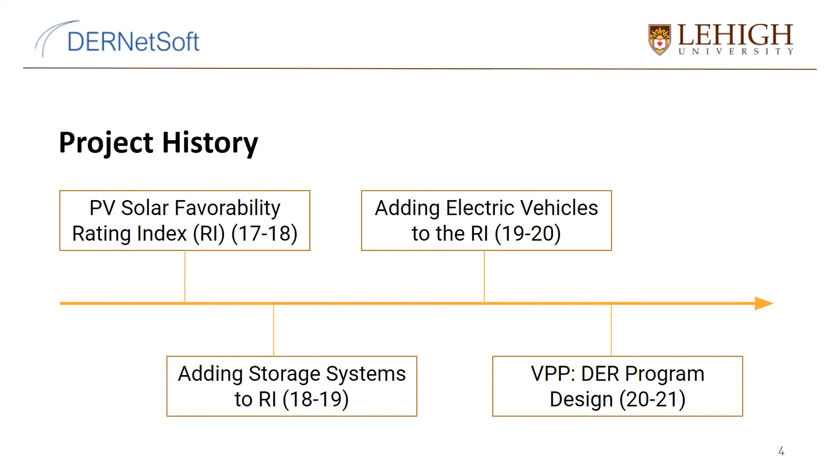This year, Jasper and I, with our project, took a bit of a pivot to the virtual power plant, the DER program design.

Project scope: last semester was a lot of research. We researched existing VPP programs, the utility approach to DERs, how they're handled, and the communication links between them. Then we collected data and requirements for DER aggregator program design, everything that needs to go into creating this program.

This semester, Jasper and I split the work a bit. I researched and decided on data models for the request and response side, taking the request side, the ISO/DSO side, while Jasper took the DER side, the response side. We created a program that accepts and responds to grid requests based on the data models we created, and we're currently working on testing and improving that program based on simulated and real data we have from DER NetSoft.

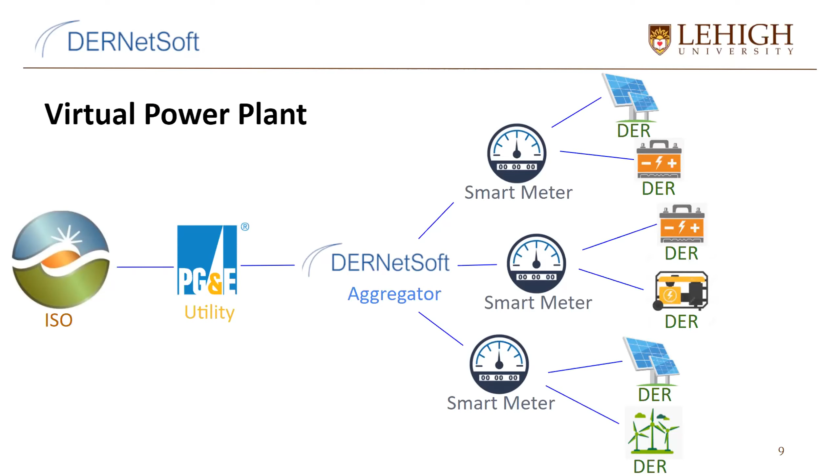Some benefits of integrated DERs and virtual power plants: it supports the grid by providing ancillary services such as frequency and voltage control.

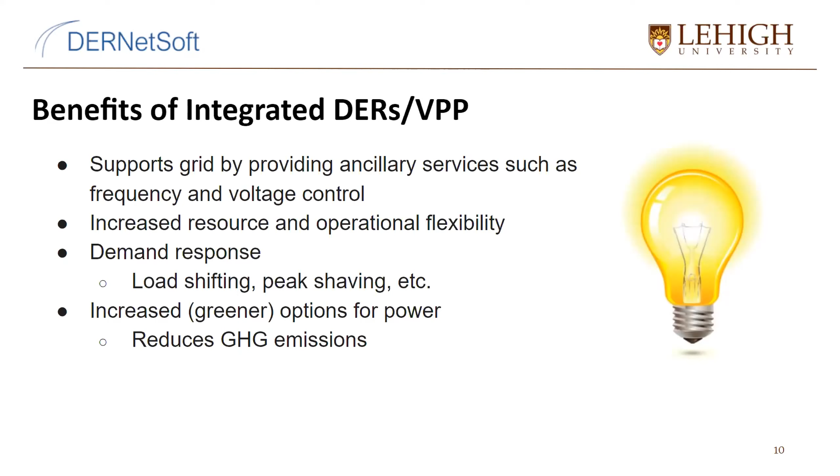It gives increased resource and operational flexibility, to talk about a little bit more with demand response. That gives the opportunity for load shifting and peak shaving, things along that nature. And the bigger picture here is increased greener options for power, so that reduces greenhouse gas emissions, which is important today.

What opened the door for a project like this to even exist, or the concept of a virtual power plant to exist, is FERC order 2222. This FERC order opened the door for DERs to participate in the wholesale market by removing barriers to entry. Before FERC order 2222, you had to meet a minimum of 1 megawatt capacity to be allowed to participate in the wholesale market. But with this order, they now allow an aggregator to aggregate several smaller capacity assets together to meet that minimum capacity requirement.

And with this, I'm going to turn it over to Jasper to talk about the virtual power plant communication links.

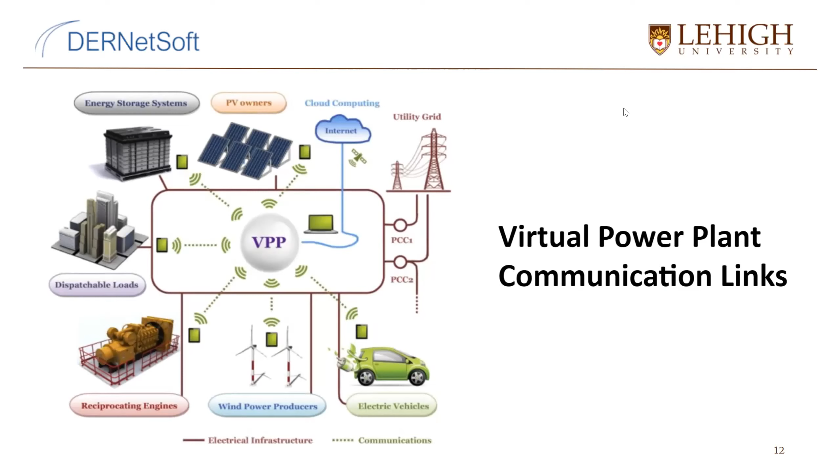Thank you, Dylan. So for virtual power plants to be effective and operational, you need both the physical and communication links. But for DERs to be connected to the grid, they already have the physical interconnection through net metering. To ensure the success of virtual power plants, we need to look more into the communication links. That's how all these distributed assets will communicate to one central point and, using their resources, be able to respond to the grid request.

To further talk about communication, we looked into smart inverters, which are the main points of communication between the DER assets and the virtual power plant. In California, they were among the first states to require implementation of smart inverters, and these requirements were prescribed in what we now call Rule 21. The smart inverters will have specific technical communication specifications, and those are outlined in 3 phases. We'll go through each of the 3 phases briefly.

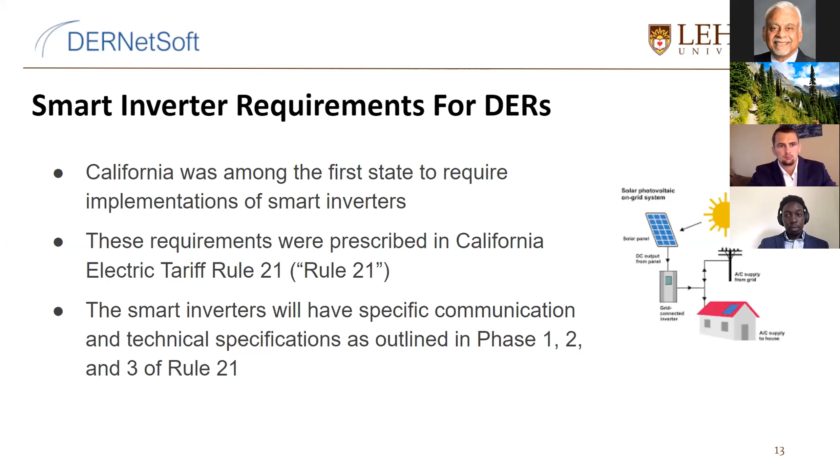So the first phase shows the capability to perform 7 autonomous grid functions. Those functions are voltage ride-through, frequency ride-through, soft start reconnection, ramp rate controls, fixed power factors, dynamic volt VAR management, and anti-islanding capabilities. These are some of the grid ancillary services that DERs can provide autonomously as long as they're connected through a smart inverter.

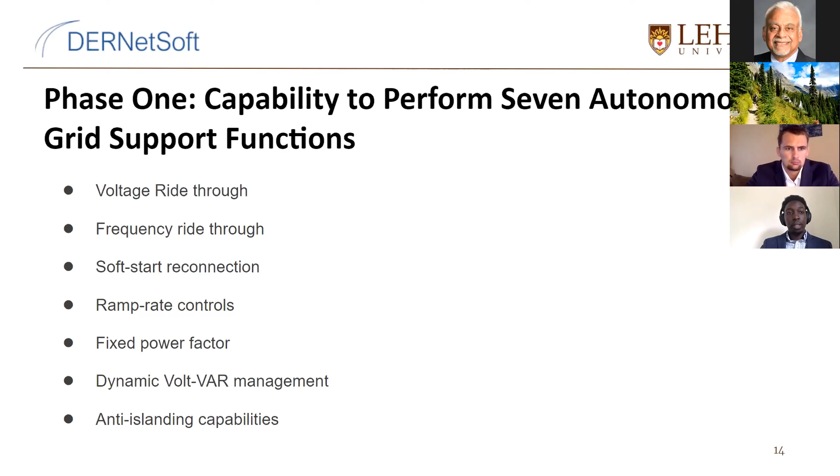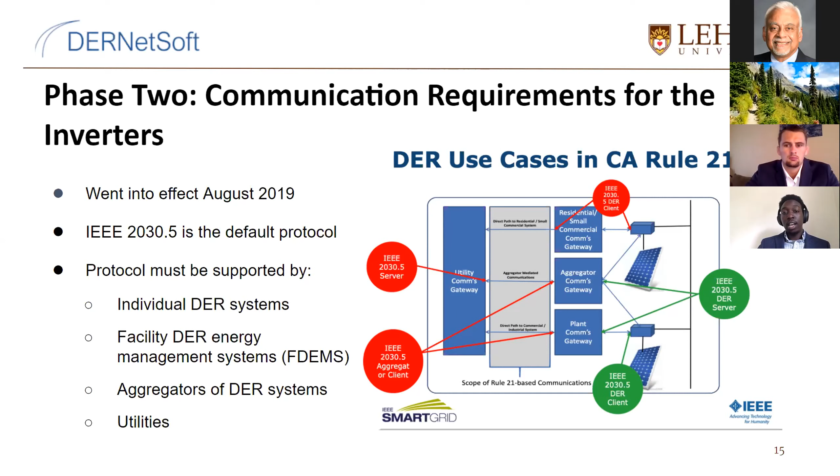On the second phase, this is where the communication requirements for the inverter are outlined. The main takeaway is IEEE 2030.5 is the default protocol chosen for communications between individual DERs with an aggregator and the utility, or directly from an individual DER to the utility gateway. This protocol must be supported by individual DER systems. If you have rooftop solar, you need a smart inverter that can communicate using this protocol. If you're a facility with an energy management system, it has to support this protocol. If you're an aggregator, you have to be able to communicate this. And similarly, if you're a utility, you need to support this communication protocol in order to effect communication between the different aspects of aggregation and virtual power plants.

On the third phase, they're adding additional advanced inverter functions, which must be done by the Smart Inverter Working Group in California. They keep trying to see what might be necessary for these smart inverters and what is possible. The functions put into effect by now in this third phase include data monitoring, remote connection and disconnection of the smart inverter, maximum power controls, frequency-watt and volt-watt functions, and scheduled power values and models. These are all additional to the first phase, and are also done autonomously by the inverter.

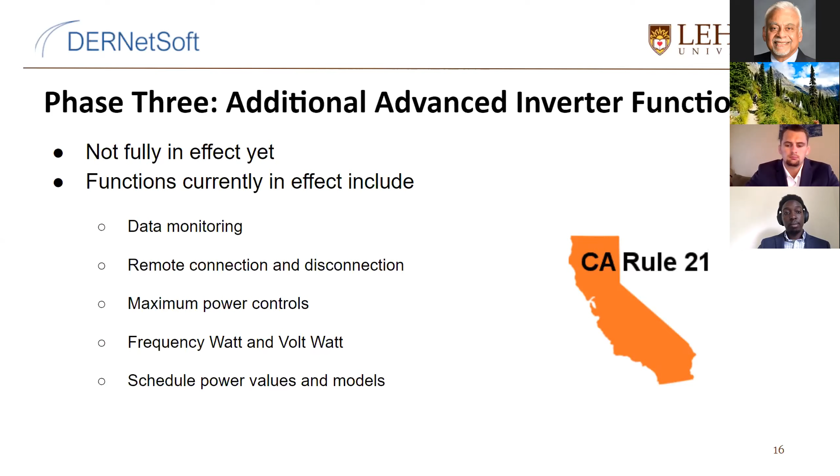So I'll give it back to Dylan to talk about the ISO DSO request side.

Dylan, you're muted. Yeah, you're still muted.

At this point, Jasper and I split up and I took the ISO/DSO request side data models. I researched existing typical request types of existing ISOs, and we're currently using DERNetSoft in the California market, working with the California ISO as well as utilities like PG&E and San Diego Gas and Electric.

We specifically looked for requests in services that our small virtual power plant could respond to. DERNetSoft gave us a subset of their assets under contract, which we used to create our program. It was important not to lose sight of the big picture, since it's not a single asset responding to a utility request, but a group of assets aggregated together, all contributing to fulfill demand.

With that, we came up with 3 general request types. The first is dispatch, your typical day-ahead demand fulfillment for energy. Next is operating reserve, a reserve that's dispatchable for black start reconnection, ramp, and emergency backup in emergency situations. Finally, the main thing our program is based on is demand response and load curtailment programs, the ability for an asset or group of assets, in our case, to reduce load over a designated period to reduce peak demand and the need for additional generation on the utility side.

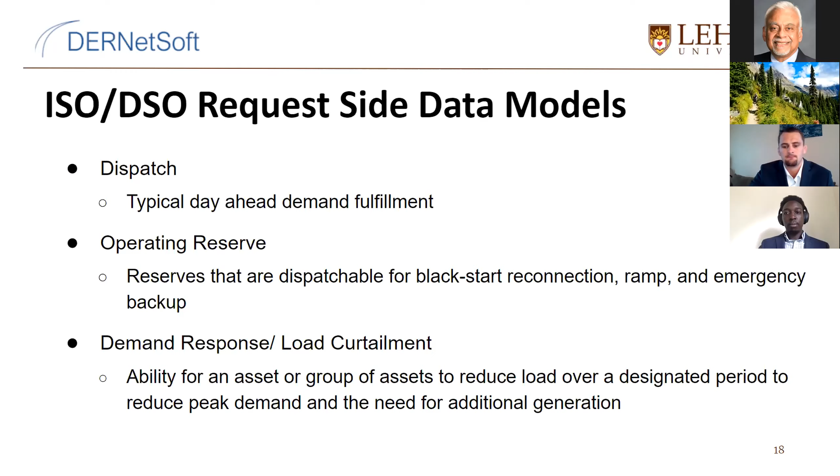Here are the request side data models we created. If a request were to come from a utility, it would have the request ID, the utility ID, and the request type. Depending on the request type, it would also include a number of other factors.

Our program is mainly based on demand response. The way it works: the ISO notifies the utility to reduce load, the utility sends a request to the virtual power plant, and the virtual power plant responds by reducing load among its eligible DER assets. Buildings can reduce load by reducing demand, reducing energy consumption, or by increasing their own generation through DERs to offset that demand.

Demand response can be one time or scheduled to recur over a period of time, normally with curtailment events during times of high demand, usually summer. DERs are incentivized to participate in demand response through time of use pricing.

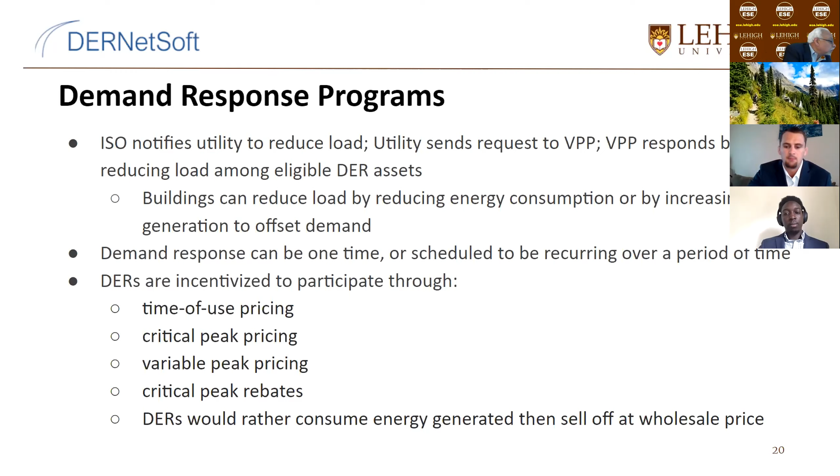During high peak hours, the price of electricity is extremely high, so they would want to reduce usage or use their own energy if possible through critical peak pricing, variable peak pricing, and critical peak rebates. Also, DERs would rather consume the energy they generated than sell it off at the wholesale price and then buy energy at the retail price, since they'd be taking a loss or it'd be misvalued for them. So they'd rather consume their own energy than sell it at wholesale.

We looked at 2 types of demand response programs. The first is the base interruptible program, a demand response program PG&E offers to eligible consumers in targeted locations to avoid overloaded lines during times of high demand, normally summer months in California. Customers are given 30 minutes to 1 day notice to reduce load to the building's firm service level, or FSL, which is adjustable but cannot exceed 85% of the building's peak usage the prior year.

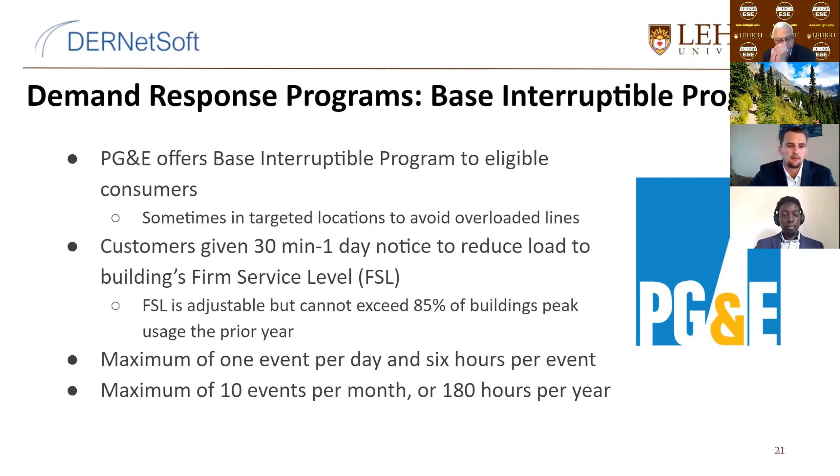So when you sign up for this BIP program, the minimum you can reduce is 15% of your demand, but you can go lower as well. It's a maximum of 1 event per day and 6 hours per event, so 6 hours a day is the longest the program or event will run. It's also a maximum of 10 events per month, or 180 hours per year.

With that in mind, we ran a quick example with Santa Rosa Hospital. In 2019, Santa Rosa Hospital's peak load was 2,163 kilowatts, in August I believe. If they were to reduce by 15%, their firm service level would be set at 1,839 kilowatts.

Customers are penalized at $6 per kilowatt hour for going over that firm service level during a curtailment event. So if you commit to being part of this demand response program, you get penalized for exceeding your firm service level during a curtailment event.

In May, they would have saved $1,070, June $403, July $728, August $674, September $1,066, October $568. That gives a total time rebate of $4,554. That seems a little small, but it's important to remember that's the minimum reduction calculated here. It also doesn't take into consideration the energy they're saving through reducing peak demand and their complete usage in kilowatt hours per month. If that were factored in, savings would be much, much higher.

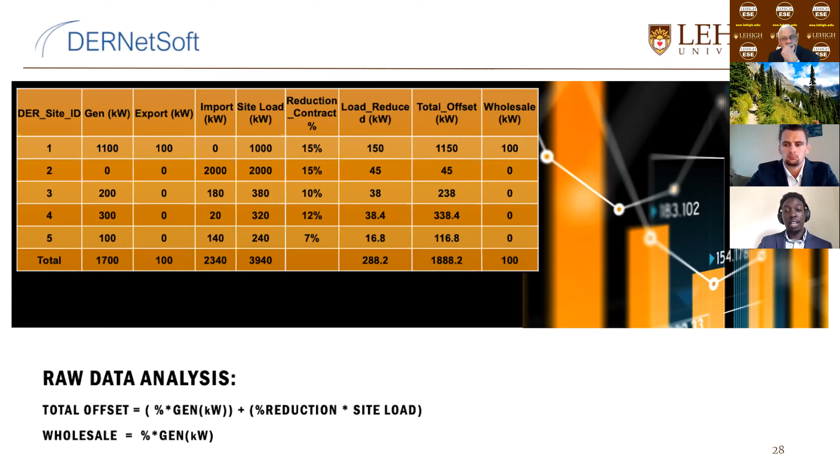With all that, we were able to find the amount of load each facility can reduce, and we use that data to run our program and select the best assets, as shown in the next couple slides.

For a time instant, let's say 1 hour, say 7 a.m., you would find out how much they're willing to reduce at that specific time. This is basically what the program will be looking into—what they're willing to reduce at the specific time of request.

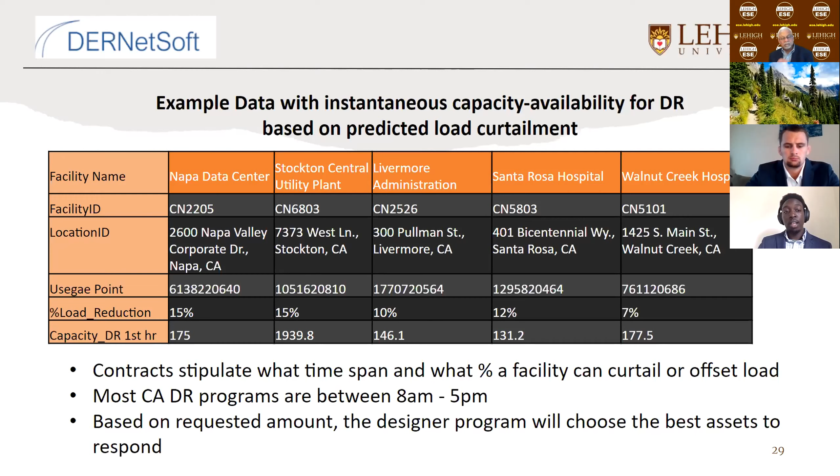To recap, contracts stipulate what time span and what percentage of the facility can curtail or offset the load. Most California demand response programs run between 8 a.m. and 5 p.m., and as Dylan said, mostly in the summer. Based on the requested amount, the designed program will choose the best assets to respond, which we'll show in the coming slides.

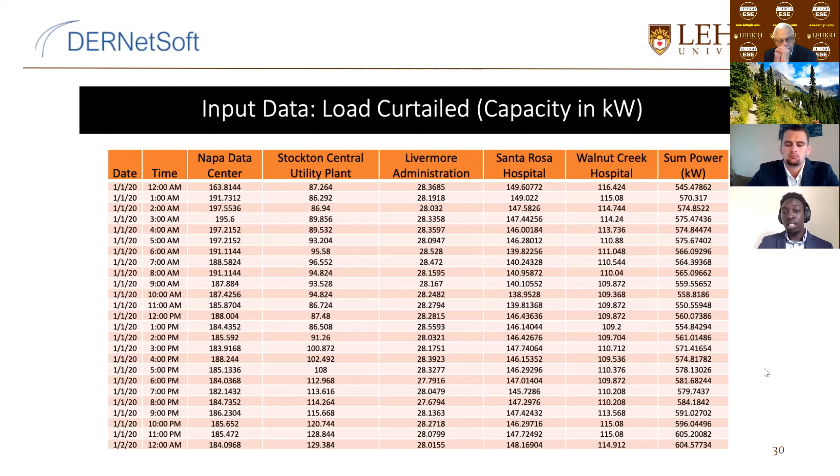And this is the data that I use for the program. But before I show you the results for the program that we ran, I'll go through how the program works on a bigger picture level.

You want to see whether the request will be available when you need it, like the next day, if it's day ahead. And if it's available, you want to notify those specific DER assets that they need to respond to that request the next day, or whatever time the request is for.

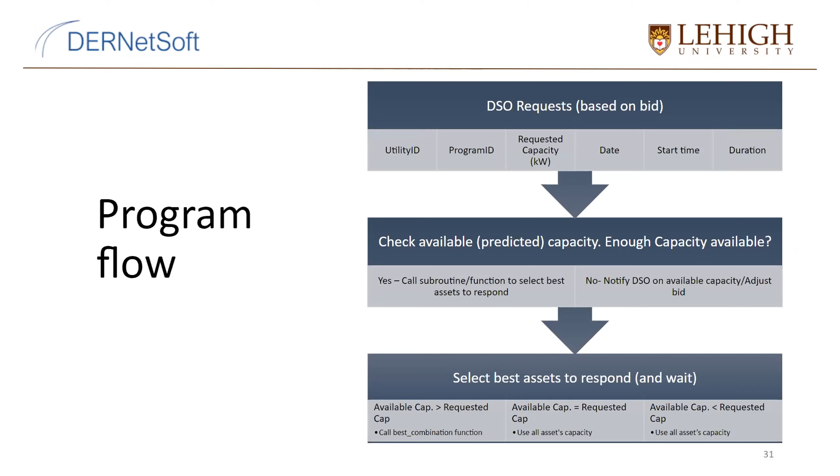And if it's not available, you need to notify the DSO that the capacity they requested is not available. The DSO can try to find other ways of making up for that power, but you need to notify them and continue using the assets that will be available.

So once you notify the DSO, you move to selecting the best assets to respond. That's just sending a notification to these assets, because this is a day ahead market. And once they receive the notification, they will check whether the available capacity is greater than requested capacity.

It will use the best combination. If the available capacity is equal to the requested capacity, it will use all the assets. If the available capacity is less than requested capacity, it will also use all that capacity, because it doesn't even meet the minimum yet, so it will have to dispatch all of it.

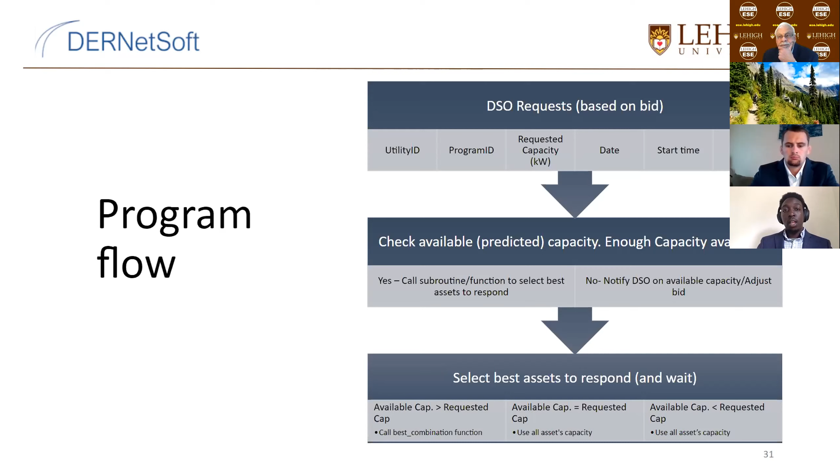So the way it selects the best combination right now, we're using capacity as the first set. So if the requested load capacity is 500 kilowatts, I'll just run the program to select the best assets to add up to 500.

But in the future, we want to have a feedback mechanism where the various DER participants are ranked depending on how they performed in the past, or other aspects, and we can use this as another means to decide which assets are best to respond, instead of just using capacity.

Also, I think previous classes had done other ranking mechanisms based on location, strategic advantages. For example, electric vehicle charging stations will have some locational advantage. So all those could be built into an artificial intelligence or some sort of machine learning to have more attributes other than capacity to select the best assets.

So once you request these assets to respond, you'll have to wait until that specific time. For example, if you send a notification to a facility to curtail load, you'll have to wait. If it's day ahead market, you have to wait 24 hours. If it's an intraday program, you wait 1 or 2 hours.

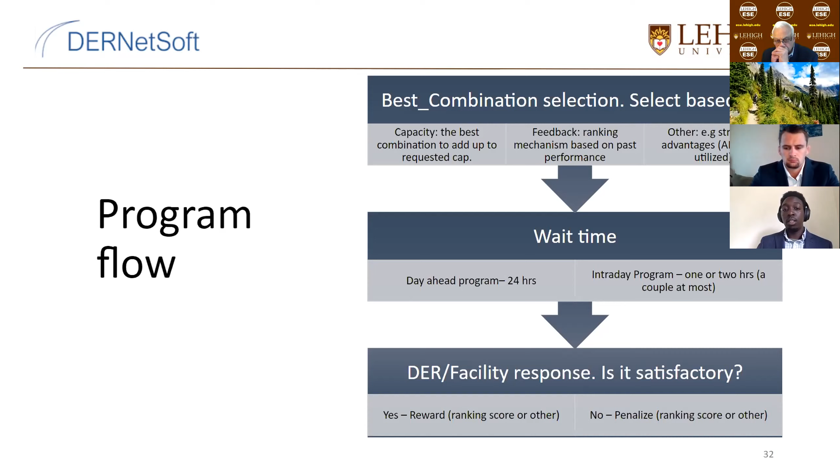So that's basically how we ran the program in Python. We basically requested inputs manually. And as you see here, I inputted 400 kilowatts starting 1 p.m. for 2 hours. So I'm requesting a capacity of 400 kilowatts for 2 hours starting 1 p.m.

So it will be 1 p.m. to 2 p.m. and 2 p.m. to 3 p.m. And the date here, we're using past data, but this will be predicted data in real life.

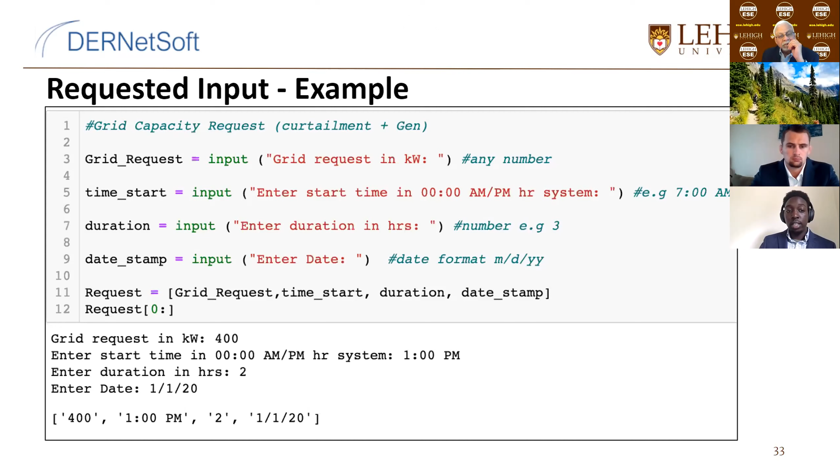After running that program, this will be the output console. You will see that specific date at the specific time you requested. That's the available capacity, 629 kilowatts, and the program will tell you the capacity that is available.

So it will select the best assets based on what's available. The sum combination of the best assets is 401, which could be reduced to match exactly that. You could find the percent of the last asset, for example, to reduce the extra kilowatts, but this is close enough. And it will tell you where those best combinations are from.

It will tell you the name of the utility that curtailed or was selected to respond, and with that you can follow up and reward or penalize depending on how they respond. So basically it will respond accordingly. You can see 1 p.m. here and 2 p.m. at the bottom. It will respond depending on how many assets are there, and it will select the best assets to respond at that specific time.

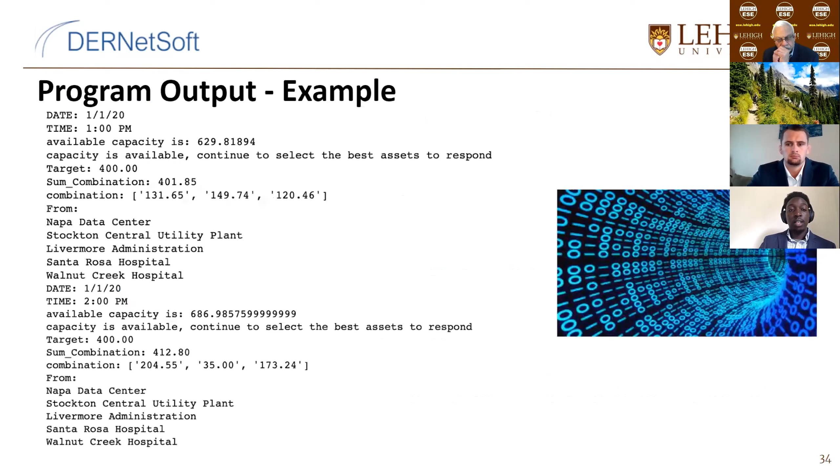And I ran in the next slide. So I ran for each of the 5 sites, for 5 days, 10 hours a day. So that's 250 data points for each of the capacity.

And I want to see how many times this program will be able to fulfill the request, in general how much we can assume this virtual power plant is able to respond. As you can see on the graph here, until 500 kilowatts, it responds 100% of the time.

So this virtual power plant can operate almost like a base generator at 500 kilowatts. So you almost guarantee that every time you request 500 kilowatts from this virtual power plant, you will have that fulfillment.

But starting from 600, it starts to respond, it's only able to fulfill 50% of the time. At 700, it's only 2%. At 800, it's not able to respond at all. It doesn't have the capacity at that level.

So with more sophisticated programming and use of machine learning, you can have some confidence level on how well these programs can respond, and it can operate pretty well at a certain level of capacity, because you know how much these buildings can curtail and how much generation you can have. So based on a lot of historical data and some sort of machine learning, you can schedule and plan for this with some sort of confidence.

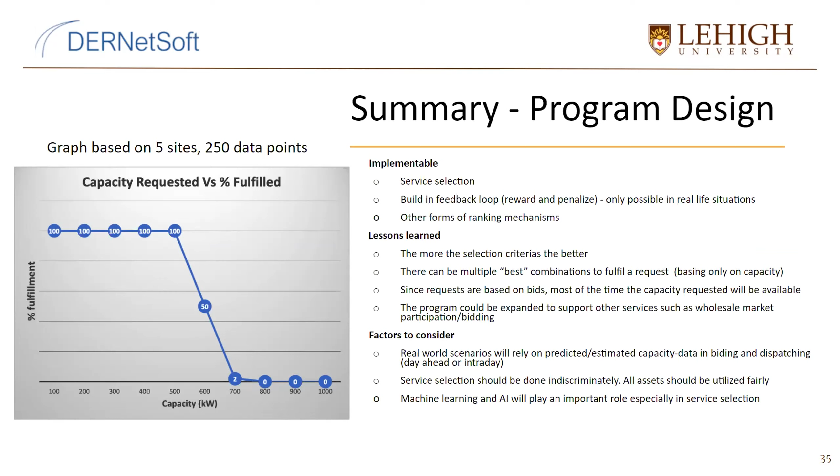So the program could be expanded to support other services such as wholesale market participation and bidding. Right now we used our program to just do some sort of demand response, load curtailment, and DER capacity. But in the future, you can expand a virtual power plant to not just participate in the retail market, but also help DER owners sell their capacity in the wholesale market if it surpasses what's acceptable in the retail market.

So factors to consider: real world scenarios will rely on predicted or estimated capacity in the bidding and dispatching. As I said, we used historical data here, from 2020, but in real life, using what you're forecasting, you will be able to fulfill the next day. Service selection should be done indiscriminately, and all assets should be utilized fairly.

So as an aggregator or virtual power plant, you have a lot of assets in your database, and you need to make sure you're selecting from those assets fairly and not discriminating against other assets. We think machine learning and artificial intelligence will play an important role, especially in service selection.

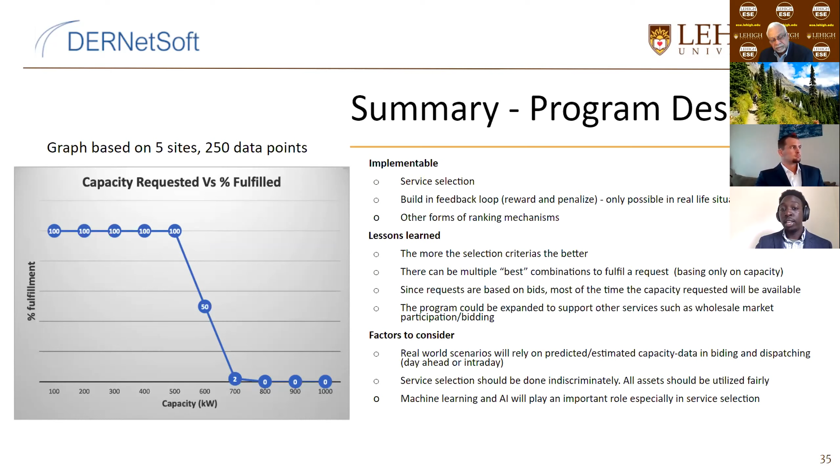To overview the entire project, we started by looking into DERs and demand response, and more so capacity. We looked into generation DERs, load curtailment and storage, and the ancillary services these can provide. We take that and put it through an aggregator to increase dispatchability of smaller resources, increase fairness, and better coordinate planning services. If you put all the DERs available through an aggregator, it's easy to manage them, and it also increases their chances of being utilized.

Technical requirements for virtual power plants: we noticed that communication links and standards are really important. As we said, IEEE 2030.5 has been selected as the standard protocol for communication in inverter-based resources.

Resource commitment happens through contracts and agreements. Most contracts are predetermined, and commitments are made beforehand. So it's not like you're calling a facility and just telling them to curtail their load — they've already agreed to do so.

Programs with electric utilities, for example demand response and net metering, could expand in the future — not just demand response, but capacity bidding and a wider variety of opportunities for these assets to participate through virtual power plants and aggregation. We also think software programming for forecasting, asset selection, and fulfilling requests will play a major role, and DERNetSoft is already positioning itself in a good place to take on this market.

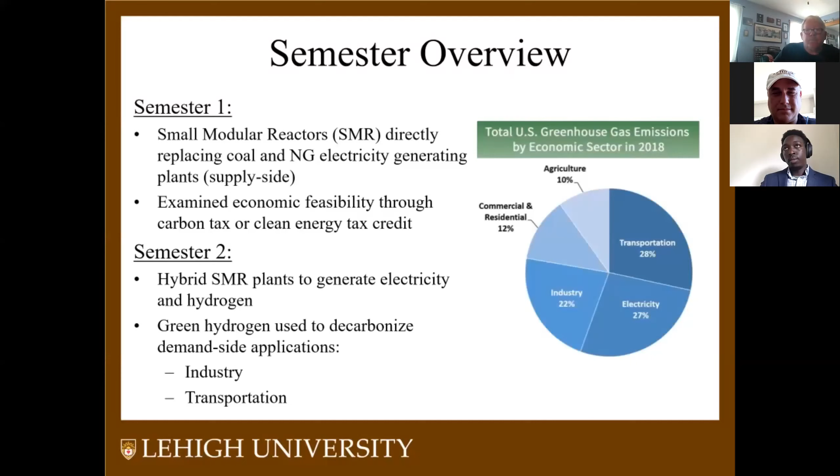Now with this current semester, I am shifting focus to the demand side. This semester, I am looking at how a hybrid SMR plant could be used to generate both electricity and hydrogen, and then this green hydrogen could be used to decarbonize specific demand side applications within the transportation and industrial sectors.

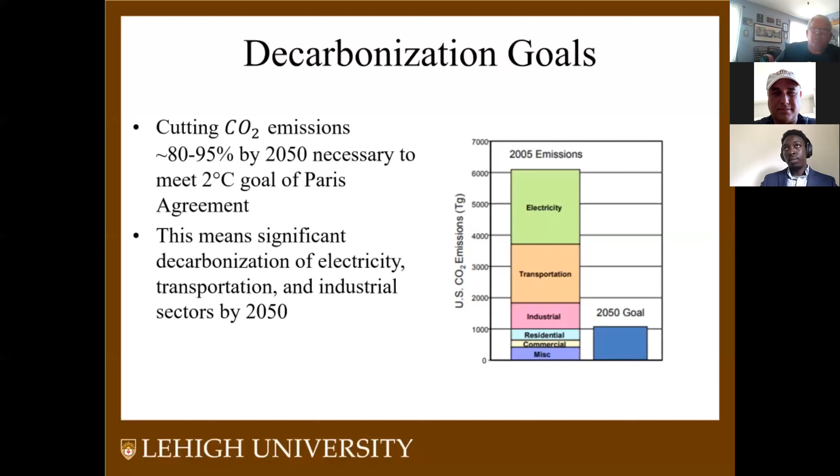Looking at our decarbonization goals, if we want to meet the 2 degrees Celsius goal set in the Paris Agreement, we need to cut CO2 by about 80 to 95% by 2050. This essentially means we need to significantly decarbonize most of the electricity, transportation, and industrial sectors.

Looking at the president's climate pledges, he has pledged to reduce our carbon by about 50 to 52% by 2030, involving nearly $2 trillion in clean energy spending over the next 10 years. By 2035, he wants 100% carbon-free electricity, which would include retrofitting current fossil fuel plants with carbon capture, preserving the existing nuclear fleet, and dramatically expanding renewable energy capacity.

By 2050, he wants economy-wide net zero, and he has included hydrogen to be used to power certain industrial facilities. On top of this, he wants to invest nearly $35 billion into climate R&D technologies, including utility scale energy storage, carbon capture, hydrogen, and advanced nuclear.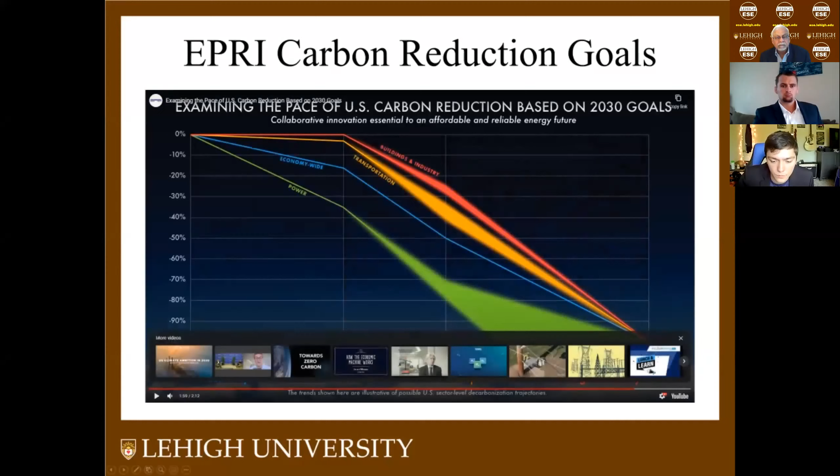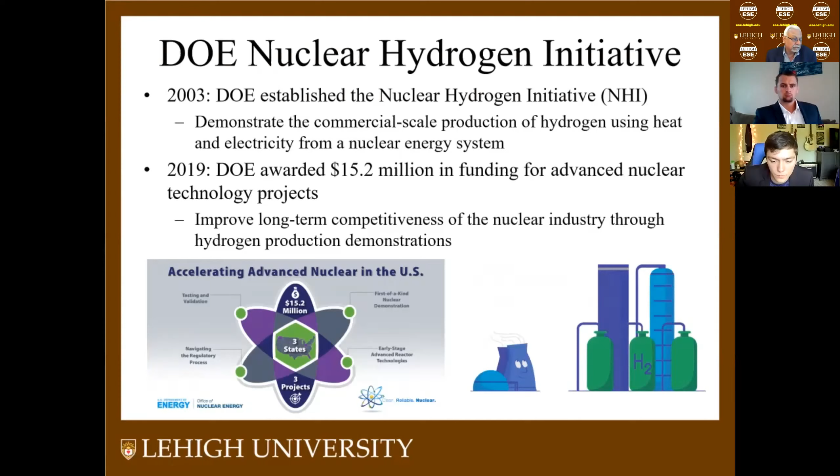In 2003, the Department of Energy established the Nuclear Hydrogen Initiative, with the goal to demonstrate commercial scale production of hydrogen using both heat and electricity from a nuclear energy system. Then in 2019, they awarded nearly $15.2 million in funding for advanced nuclear projects, with the goal to improve the long-term competitiveness of the nuclear industry through hydrogen production demonstrations.

The DOE also has a program called H2 at Scale, with the goal to efficiently scale up the production of hydrogen using all clean energy sources, including nuclear. On the right, we can see both nuclear and renewables could be used to generate electricity, which could then produce green hydrogen, which could then replace fossil fuels for heating in specific industrial processes like the production of steel, ammonia, synthetic fuels, and also for fuel cell EVs. H2 could also be used as a medium for energy storage.

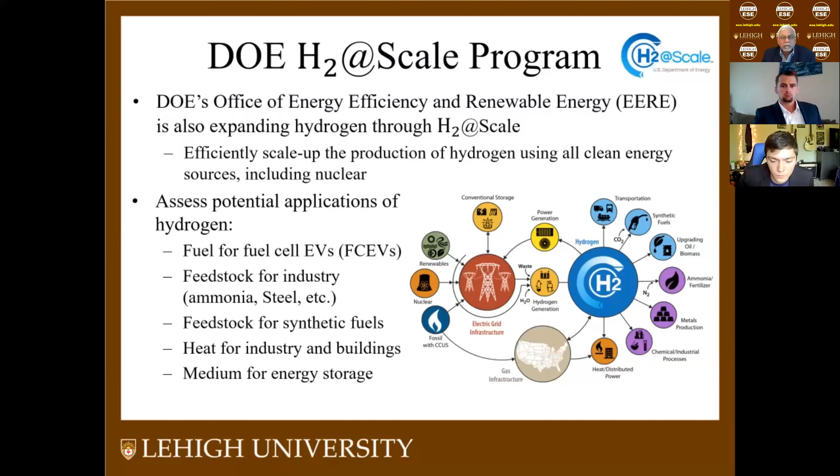Through the H2 at Scale program, we can look at future demand scenarios for hydrogen. Current demand stands at about 10 million tons of H2 per year, mostly used in oil refineries and for the production of ammonia. Looking at the 2050 aggressive demand scenario, total demand could increase by 6 times to 60 million tons of H2 every year.

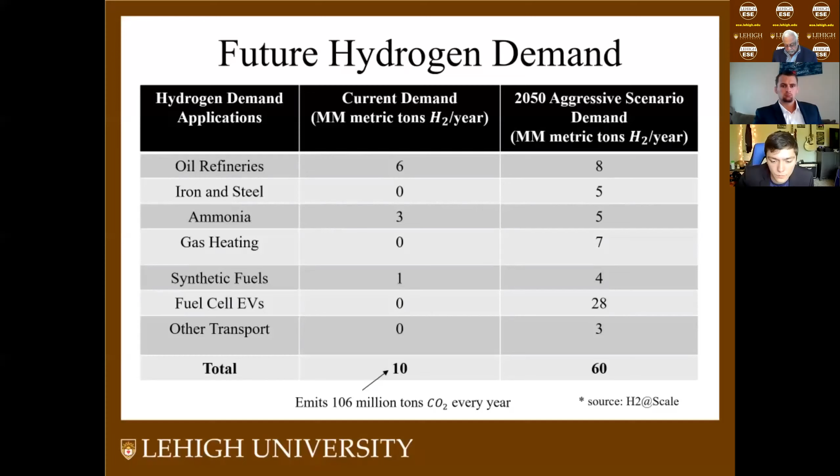This increase in demand can be attributed to the use of hydrogen in the iron and steel industries for heating, more synthetic fuels, and to support the increase in fuel cell EVs. The current production of H2 accounts for about 106 million tons of CO2 every year.

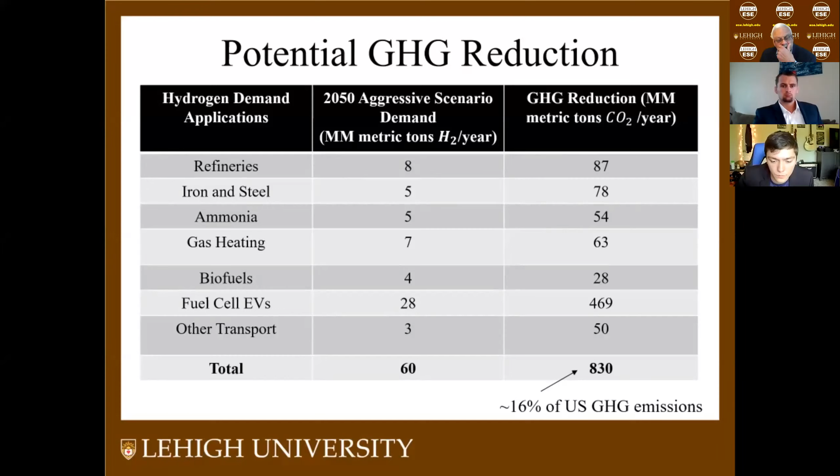We can also look at the potential GHG reduction if we switched some of these processes from using fossil fuels to using green hydrogen. In the 2050 aggressive scenario, switching all of these processes to green hydrogen would offset nearly 16% of all our GHG emissions. Currently, most hydrogen is formed from a process called steam methane reforming.

This is known as gray hydrogen. During this process, natural gas is used both as the chemical feedstock and also as the source of the high temperature heat. Currently, over 95% of the total H2 supply comes from fossil fuels.

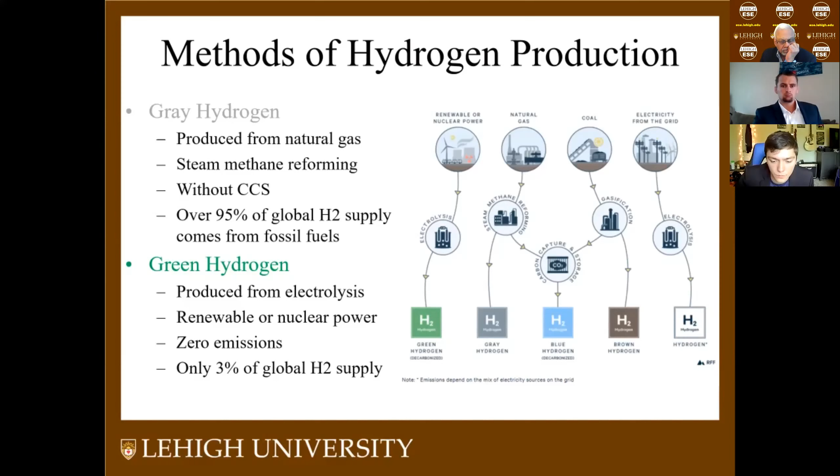Shifting focus to green hydrogen, which is produced from electrolysis. This process would use electricity from renewable or nuclear sources. Obviously this would have zero carbon emissions, but unfortunately electrolysis only accounts for about 3% of the global H2 supply.

Here's an overview of the small modular reactor. In this scenario, each of these modules would have the capacity to generate either electricity or green hydrogen. A single SMR plant could have up to 12 of these SMR modules, basically creating a 720 megawatt total plant. Each of these SMRs would have the capacity to use high temperature steam electrolysis in order to produce this green hydrogen.

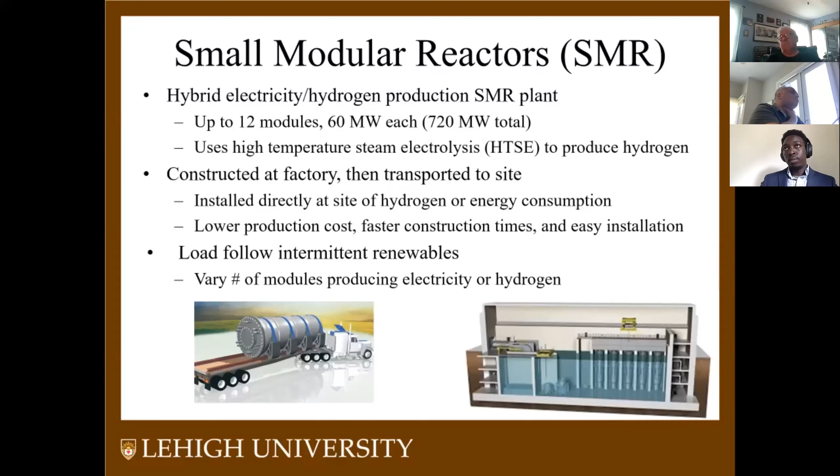Also, due to their modularity, they have the ability to load follow solar and wind. This can be accomplished by changing the number of modules that are either producing electricity or hydrogen. If the supply of solar and wind is at a peak, the SMR plant can shift towards producing more hydrogen, since at that point it wouldn't be profitable for the nuclear plant to generate electricity. However, when the supply of solar and wind is at a low point, the SMR plant could shift towards producing more electricity at a time when it would be more profitable.

As I mentioned, SMRs basically create H2 through a process called high temperature steam electrolysis. This is accomplished by using steam and electricity from the nuclear plant to split H2O into H2 and O2. This process is more efficient than conventional forms of electrolysis. Just one of these SMR modules has the capacity to generate nearly 18,000 tons of H2 every year, which would offset about 168,000 tons of CO2 every year.

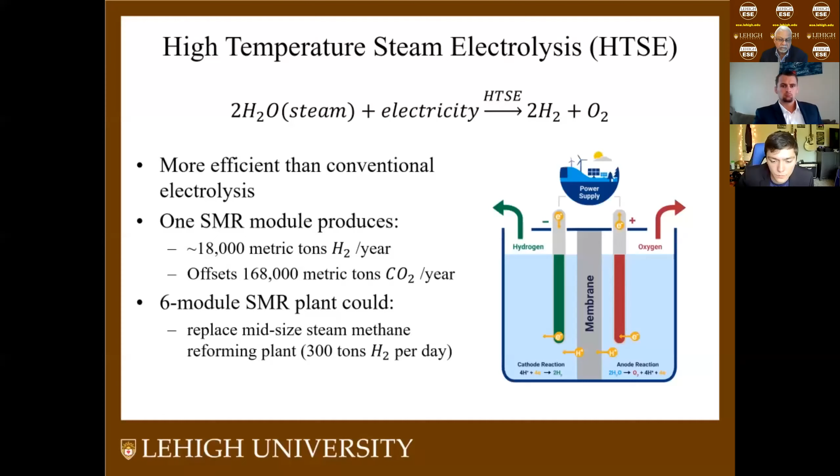So if we want to replace a mid-sized steam methane reforming plant, a 6-module SMR plant would have the hydrogen production capacity to replace one of these plants.

Now we are going to shift focus and examine how this green hydrogen could be used in the industrial sector. The EIA projects that by 2040, over half of the energy consumed will be by the industrial sector. Industry will be especially hard to decarbonize due to the use of fossil fuels as both the chemical feedstock and the source for high temperature heat. Green hydrogen is often seen as a possible option to decarbonize several of these industrial processes.

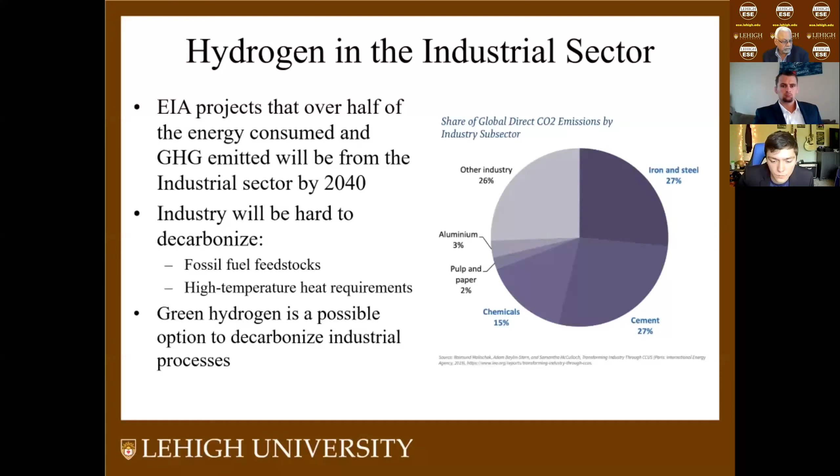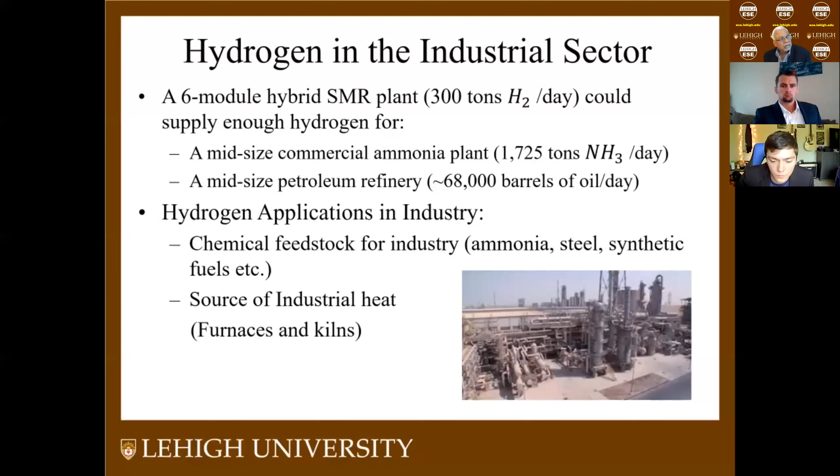A 6-module SMR plant could theoretically supply enough green hydrogen for a commercial ammonia plant or a mid-size oil refinery. Other hydrogen applications in industry include use as a chemical feedstock for several industrial processes, such as ammonia, steel, and synthetic fuels. It can also be used as a source of industrial heat for furnaces and kilns.

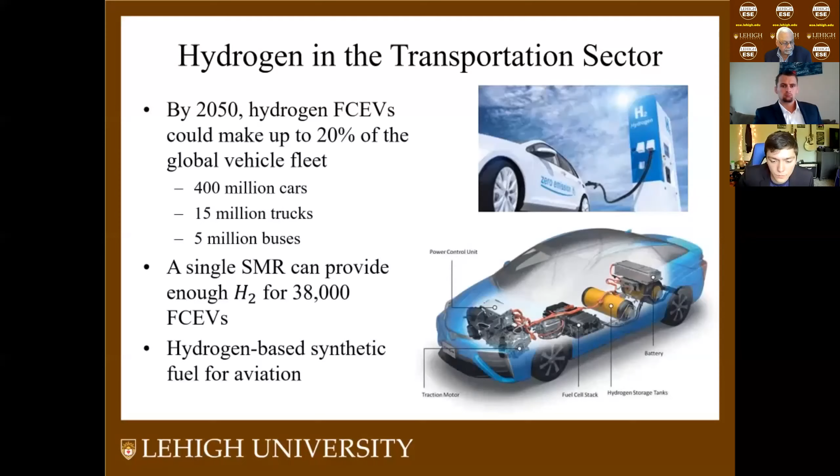Shifting focus to the transportation sector: even though battery-powered EVs are more energy efficient than fuel cell EVs, it is projected that by 2050 fuel cell EVs could make up 20% of the total vehicle fleet, including nearly 400 million cars. A single SMR module could provide enough fuel for about 38,000 of these fuel cell EVs. For aviation, green hydrogen could be used to make synthetic fuels for planes.

So looking at the current demand for H2, it would currently take about 46 of these 12-module SMR plants in order to completely supply our total demand for H2. And so this would obviously offset CO2 by about 106 million tons of CO2 per year.

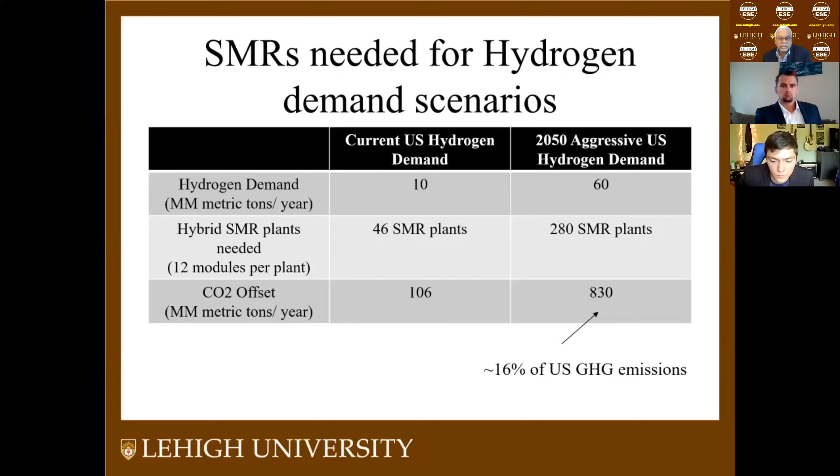And then shifting focus to the 2050 aggressive demand scenario, nearly 280 of these SMR plants would be required. And under this scenario, nearly 16% of all of our GHGs would be

offset by the use of green hydrogen. So now looking at the cost competitiveness of nuclear high temperature steam electrolysis, we can compare that to the conventional steam methane reforming.

So the current federal target for the green hydrogen levelized cost is about $2 per kilogram of H2, and we can see that this target is actually met when the SMR plant is capable of producing electricity for a cost of less than $44 per megawatt hour.

And then looking at the current levelized cost for conventional methane reforming, which is about $1.59 per kilogram, we can see that nuclear electrolysis meets this when it's able to generate electricity for under $30 per megawatt hour.

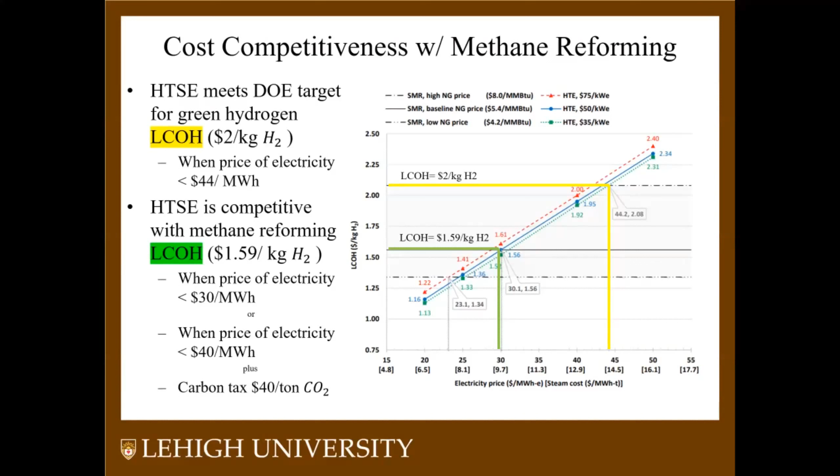So just to summarize, green hydrogen can be used to decarbonize parts of both the transportation and the industrial sectors, and it has the potential to offset total emissions by about 16%. And this will help us reach net zero by 2050.

And specifically these hybrid SMR plants have the capacity to produce green hydrogen at the site of consumption, while also supplying clean and reliable electricity to the grid.

And due to their modularity, they have the ability to load-follow as well as supplement solar and wind, and by also generating green hydrogen, this would also increase the financial competitiveness of nuclear plants.

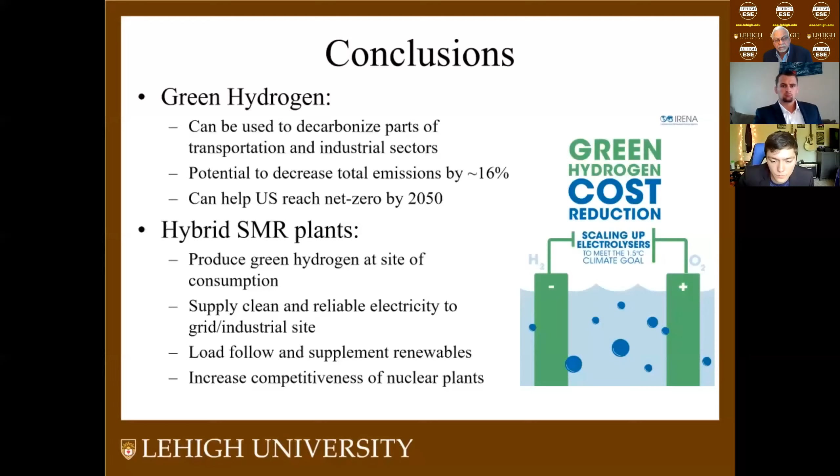Good evening, Thomas. This is, oh, wait a minute. Let's make sure you can see me. Horace Davis here with Con Edison. Very interesting presentation and concept.

My question for you is, you had mentioned about these modular units providing hydrogen and then being able to, based on market rates of electricity, shift between generating electricity and generating hydrogen. What would the time span to transfer between producing hydrogen and electricity be?

Yeah, so basically, I'm pretty sure it could take up to a few hours. I think it's as short as like 30 minutes or up to like 2 hours.

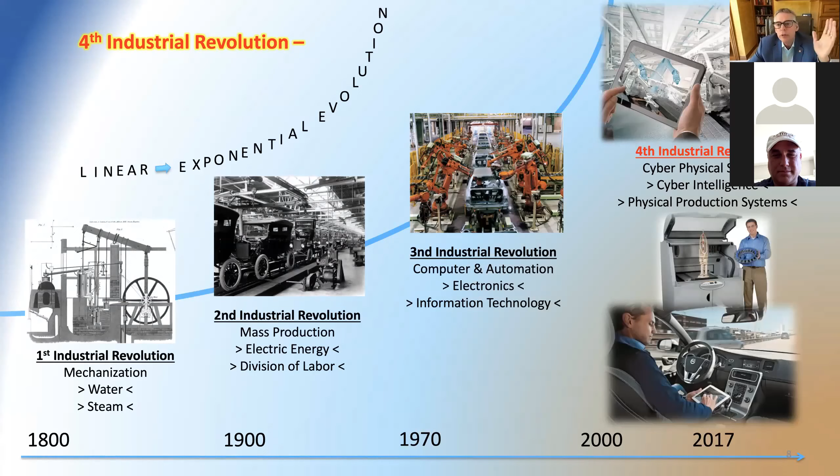It all began in the 1800s with the first revolution, where we harnessed the power of steam and water and mechanized material developments. We evolved into the second industrial revolution by applying electric power and specializing different parts of our labor to improve our ability to mass produce. In the third revolution, we added computing technology and automation.

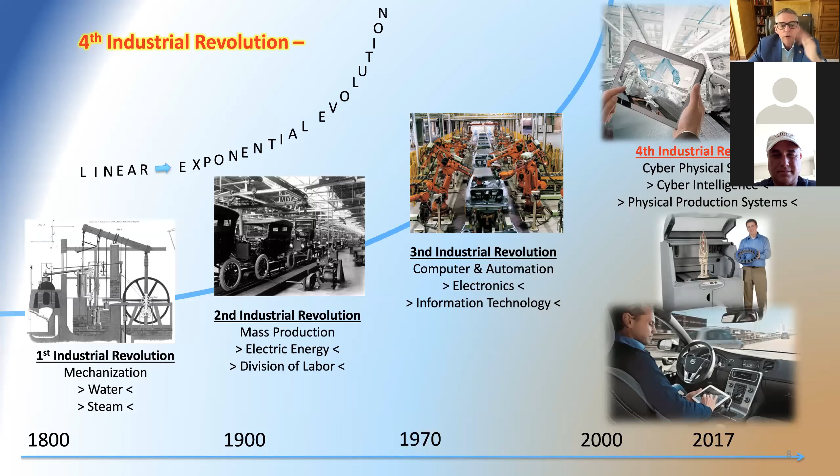So digitization of processes to further improve production capabilities.

And lastly, the fourth industrial revolution. This represents a convergence of cyber intelligence with physical systems, actually blurring the line between the two. The things we're seeing today as part of the fourth industrial revolution, like 3D printing technologies, driverless cars, and many other fantastic capabilities, are becoming the new reality.

And all this evolution, the pace at which it's impacting us, has become exponential. Technology is moving faster than industry and much of society can keep up with.

Some people may recognize, I don't recall exactly when this happened, but in the late 1950s, Sputnik, the Soviet Union, launched the first artificial satellite into orbit around Earth. For the first time, American families could stand in their backyard and see that satellite flying over their homes, and fear gripped our nation.

How long would it be before an artificial satellite flying over us could do harm? So we had our Sputnik moment, and we all know that concluded with President Kennedy's initiative to place a man on the moon by the end of the decade, which was accomplished.

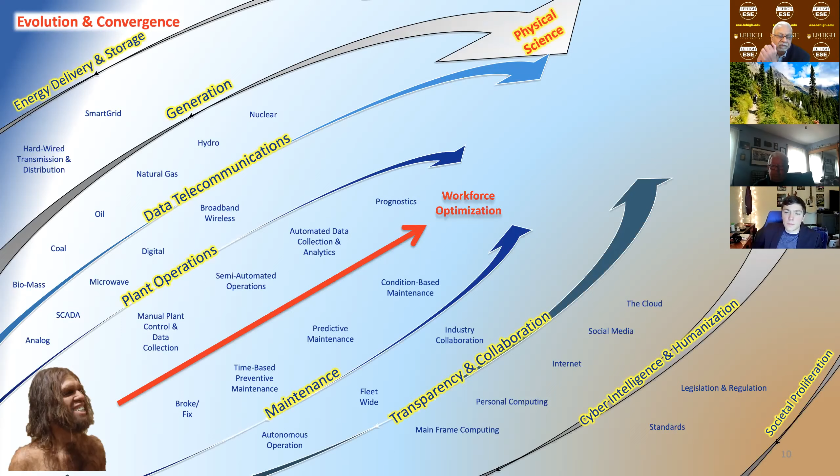So where have we come from and where are we going? I know there's a lot of words here, a lot of thoughts. Think of it this way, think of this as an XY axis. The y-axis being the technology that we apply to generate, transmit, and share electrical power. And the horizontal axis represents how we as a culture, society apply technology to achieving those goals.

So back in the caveman days, we operated our plants very manually. We collected information in a very manual fashion. We walked around with paper clipboards and pencils, taking readings off of analog gauges. We would operate the plants and we would only perform maintenance when something broke.

So over time, we've developed more semi-automated operations. We've evolved to develop preventive maintenance activities so that our plants can operate more reliably. We adopted predictive technologies, and we've migrated from time-based preventive maintenance to condition-based maintenance. And so really what we're seeing over this timeline from our early days is we now have developed the capabilities and the technology to optimize our workforce.

This is critical for nuclear. The single largest cost of any nuclear power plant are the people that are required to be there to operate and maintain the facility. And that number, from the early days of the industry, an average 600 megawatt plant, it's probably got twice the workforce that it had when that plant opened up because of all of the overhead.

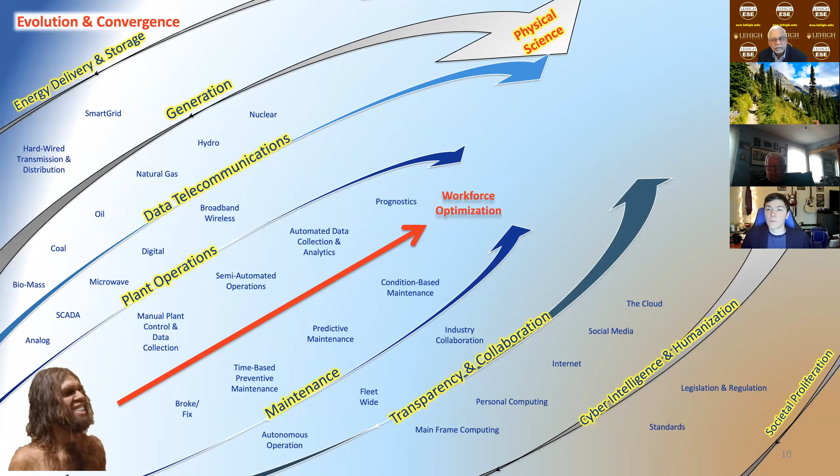Technology offers an opportunity for us to automate a lot of the things that we are still doing manually: data collection, automate analytics, automate regulatory compliance where possible, and that sort of thing. So workforce optimization—and going forward, this will lead to a convergence of all of this.

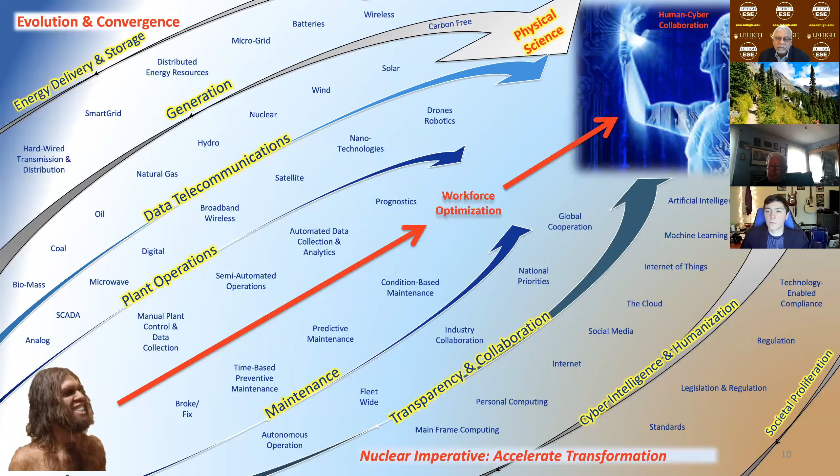Cyber capabilities converging with physical science to enable a digital workforce of the future. One joke is in the nuclear plant of the future, there'll only be 2 operators in the control room: a person and a dog. The man's job is to feed the dog, and the dog's job is to bite the man if he touches anything. So this is ultimately where we could be heading.

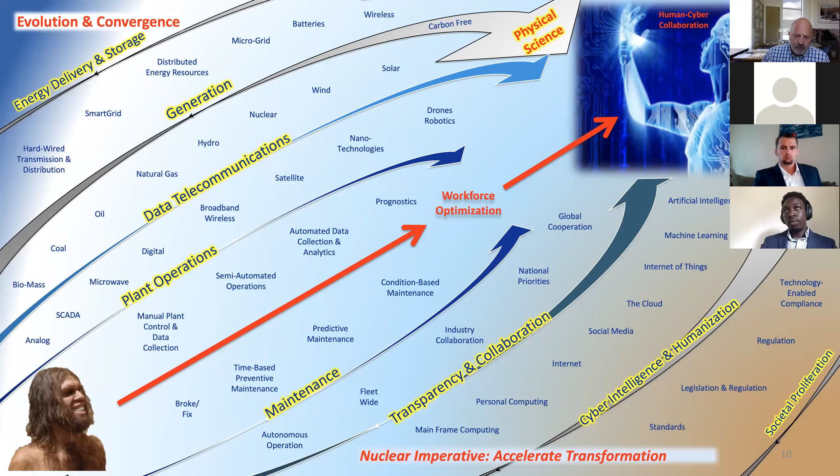And evolution, as you know, is survival of the fittest. This will happen, whether we transform or not—this is what's happening. And so rather than evolution, we as an industry should think of transformation. The nuclear industry's imperative is to accelerate this transformation.

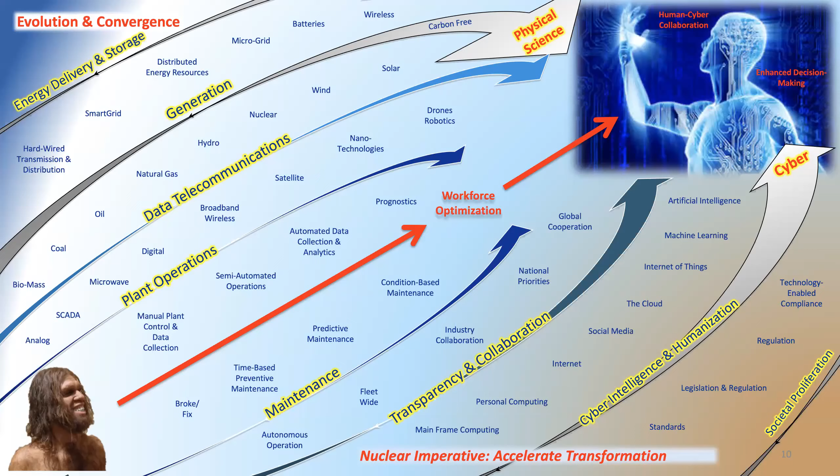So transformation's a journey. How do we know when we get there? I'm going to talk here in a moment about this DOE-sponsored initiative that we're participating in that's designed around industry transformation. As we got into this project, we built our project around some foundational principles. Not all of these are completely accepted by the industry, but this was where we started.

Nuclear power has the capability to remain cost competitive without subsidies or other artificial considerations in the long term, getting back to the days of virtually too cheap to meter. Looking to core business processes to be standardized and then optimized and shared more completely across the industry. Automating repeatable tasks—the operators with clipboards in the plants—using technology to capture that data, analyze it, and virtually eliminating human inspections in favor of advanced technologies and remote centralized monitoring, and taking traditional fixed expenses that each nuclear plant assumes individually and variabilizing those and sharing the costs incrementally across a larger population base. And this represents actually a bold new paradigm or challenge that our industry needs to face.

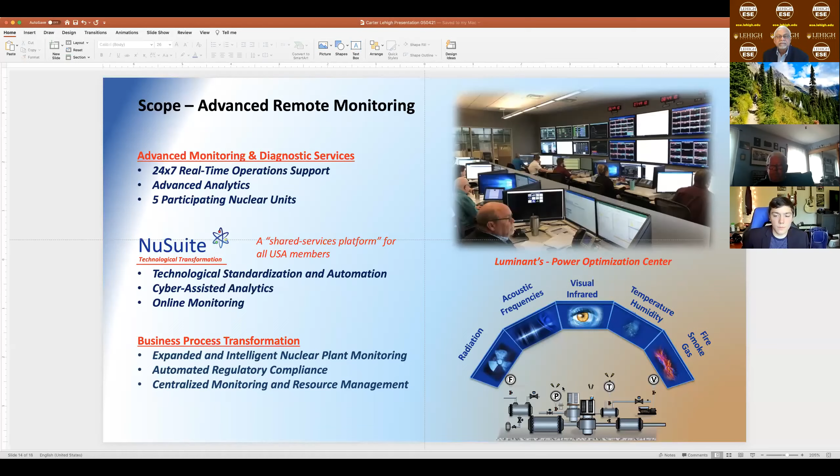So the scope of the Advanced Remote Monitoring Initiative is threefold. First, Rudy mentioned Luminant's Monitoring and Diagnostics Services Center located at our corporate headquarters in Irving. We call it the Power Optimization Center, the POC, shown on the upper right. The POC is a 24/7 real-time ops support center that looks at real-time power plant performance efficiencies and reliability of systems and equipment, using machine learning technologies to try to get ahead of problems.

As a part of this project, we will have 5 participating nuclear units that will be monitored by the POC to demonstrate to our industry the value contributions such a centralized service can deliver.

Second, the development of NuSuite. This is a shared services platform for all USA participating members that we ultimately intend to share with the broader industry. NuSuite is comprised of modules, much like the apps on the cell phones we all carry around, so developing standardized technology apps that will help the power plants perform different workflow processes through technology to drive costs down.

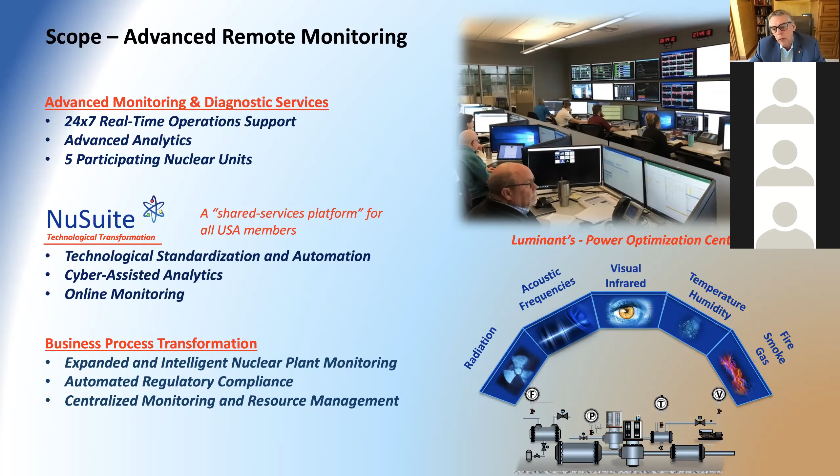And then you can see on the right, as a part of this project, we'll be deploying additional sensing technologies - radiation, cameras, acoustics, temperature, humidity, smoke detectors - and bringing all of that together into the NuSuite environment to enable us to monitor real time what's going on in the plant without the need for humans to be constantly roaming the facility just to verify that everything is the way it should be. Those valuable resources can be focused on more productive activities while technology monitors the plant and enables us to drive cost out of the business.

Automated regulatory compliance, deploying wireless sensing technologies in the plants in order to accomplish shiftly regulatory surveillance requirements without the need for human manual effort at all. Reducing operator rounds - again, deploying field sensing technologies in the plants to demonstrate that we can virtually eliminate operator rounds and inspections in favor of technological monitoring.

Monitoring remotely radiation work activities going on in the plant to reduce radiation exposure and also the cost of human resources needed to provide radiation protection oversight. Process anomalies detection - developing an intelligent machine learning algorithm that can monitor the plant digital control system and plant computers to identify emerging anomalies and understand whether it's an instrumentation issue or a real process change.

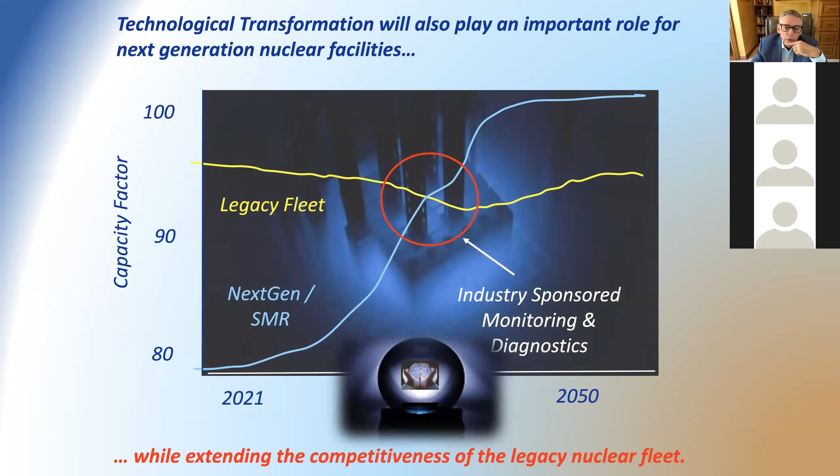So that's the Advanced Remote Monitoring Project. Taking this beyond this 3-year industry demonstration initiative, we see opportunities for technological transformation. It will play an important role not only for preserving legacy nuclear operations, but next generation and small modular reactors, building this capability to leapfrog the workflow and processes in next generation reactors based upon our learnings, and similarly bring new learnings from small modular deployments back to the legacy fleet. We see a sweet spot for technology to help us sustain high performance, low operating costs of the legacy fleet, while accelerating the maturation of next generation reactor technologies through advanced online monitoring.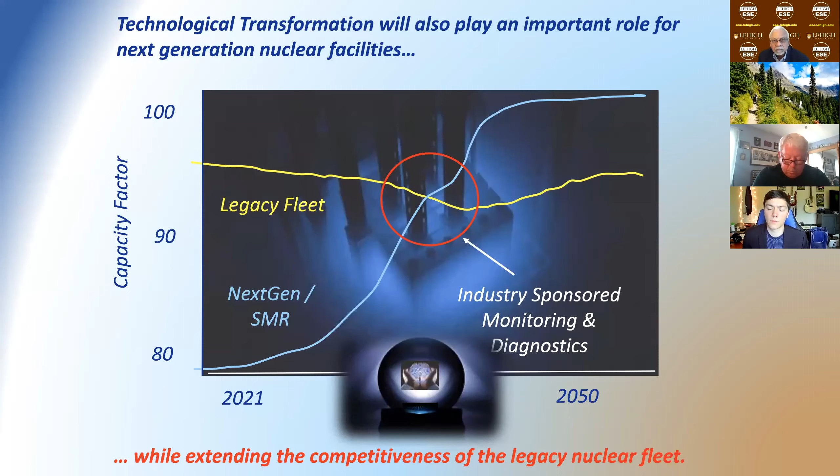Benefits for the participating utilities: we see opportunities for strengthening safety, performance, and reliability. We are looking at objective third-party evaluation through this industry demonstration to determine the actual benefits and the opportunity to develop a standardized platform that the participating utilities will own, so they are not subservient to third-party software providers and annual license fees and that sort of thing.

For the nuclear industry, we are generating a strategic roadmap for transformation based upon our learnings from this project, and a supporting business case for business process redesign through the application of technology. For our nation, and why the DOE is invested in this, it's to help us sustain the large-scale benefits of nuclear power, while preserving our nation's single largest source of zero carbon generating capacity, and ultimately to reduce the need for new and ongoing subsidies to help sustain nuclear.

And so in closing, technological disruption, environmental priorities, economic realities are bringing about a radical transformation of our industry. It is our intention to work together to preserve nuclear power for the benefits of all mankind and to continue to sustain Eisenhower's vision that he promoted as part of Atoms for Peace. And so with that, I thank you for your attention.